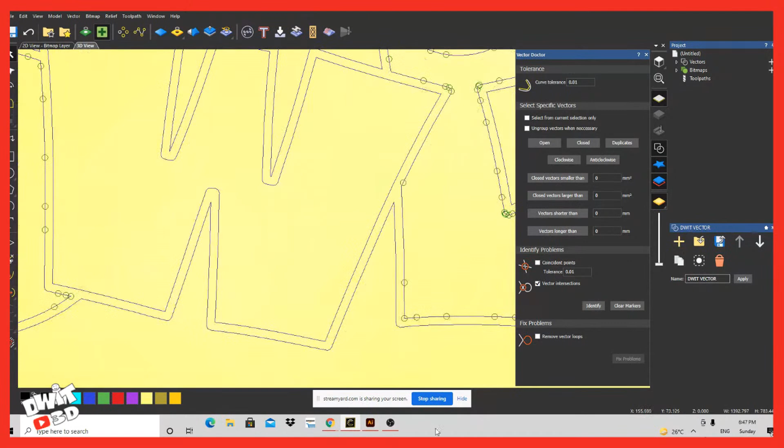Oh, I have to select the vector first and then check for it. Oh, and there's a lot of vector intersections happening here. But I think that's okay, because this is basically supposedly showing me where there's issues with broken lines. But there should not be any broken lines in here. So let's see, no, I think we're okay.

I hope we're okay. See, I told you I don't know what I'm doing. Hey Mike, how you doing? Good evening. So let's see what's happening here.

Let's see what happens if I try and add a toolpath to this. So what I want to do here is a V-carve. I'm going to select my size of my material.

And it was the thickness of this stuff. Let me double check, I got to grab my caliper here. Just got to measure the thickness of this stuff, guys. Hang on one second.

I know this is not your typical stream for me. I've never streamed actually doing software before, so I'm kind of new to this.

So it looks like we're doing 10.8 millimeter thickness here. I'm going to call that 10.5 millimeters thick on this board. Okay, there we go. So this piece of board that I'm going to carve onto is 10.5 millimeters thick.

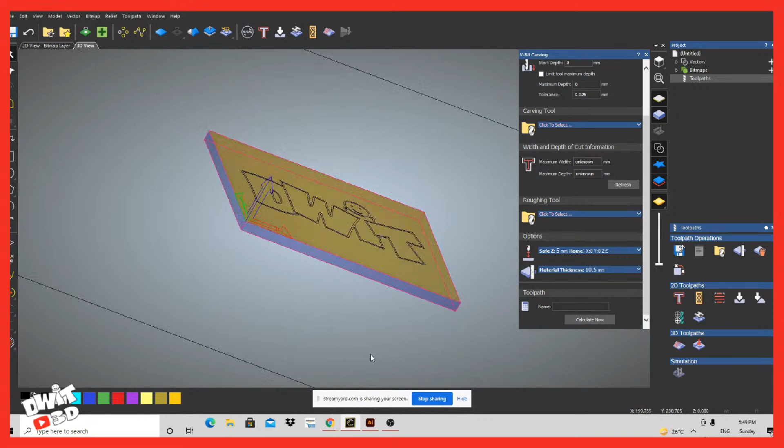So I'm not worried about all of that. The model position and material, we don't worry about that because that's only when we're doing 3D carving. So there's my material. Now in the 3D view, if you look, it's actually given a representation of the thickness of the material now that I've selected a material. Now I've got my material.

Now I want to check, I want to select my tool. Now I haven't set up any of my own tools in here, but they've pretty much got all the tools I need in here. So wood, and then a V-carving tool. Now my V-carving bits are 60 degree, I'm pretty sure they're 60 degree bits here. And they are 8 millimeter. 8 millimeter?

Because all I have to do is edit one of these and copy it. Oh, sorry, that's a 3mm bit. Now I think the 6mm might be the length. Yeah, I think that is, and this is a 6mm long bit. So we're good on that.

So I'm going to select this one, but I'm going to edit, and I'm just going to tell it that it's a 60°. I'm pretty sure this is a 60, or is this bigger than 60? Let me think. 60? Sorry, 60. Yeah, I believe these, no, these might even be 45.

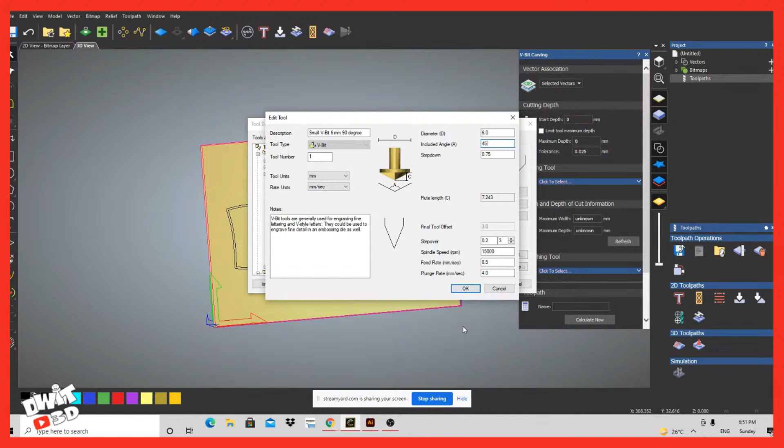So let's see. We're going to call, no. It's not a 60, 45. I'm trying to find in the packaging the bits that came with this thing. It's either a 60 or a 45, and it does not look like a 60 to me. It looks more like a 45° V-bit. So I'm going to go with that. I can always change that if I so choose afterwards.

So again, new to this software, so you got to bear with me for a second here. So my starting depth is 0 because I'm going to start at the top of the wood. Maximum depth that I want to go, I'm going to say a maximum depth of 3mm to start.

Whoops. No vector. Oh, I have to select the vector. See, I have to select the vector. So if I click refresh here, oh, vector intersections. I don't want that to happen. I don't like those intersections. Oh, this was supposed to go a lot easier than this.

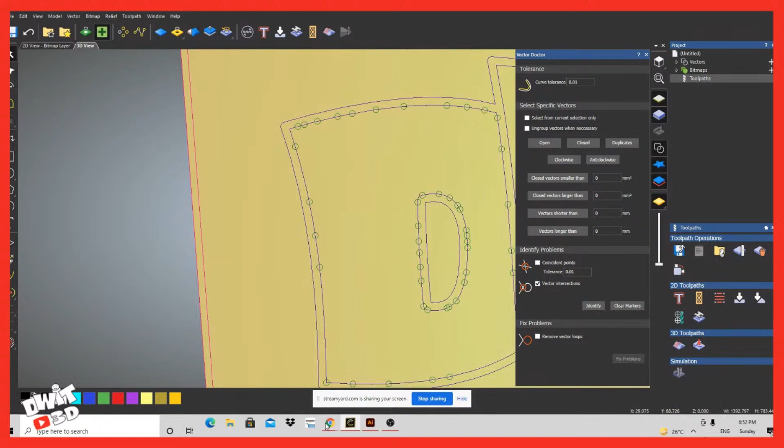So I could open up the vector doctor again. And I somehow got to fix all this. I don't believe... Oh, I see, that obviously I've got an issue with my file here. But there's no intersecting vectors there. What that's telling me is that there's two vectors overlapping, but there's not.

So I believe a quick way to fix that... Again, sorry guys, I just watched tutorials on this last week, so I'm pretty new to this, and there is a way to fix that. And it's to select my vector.

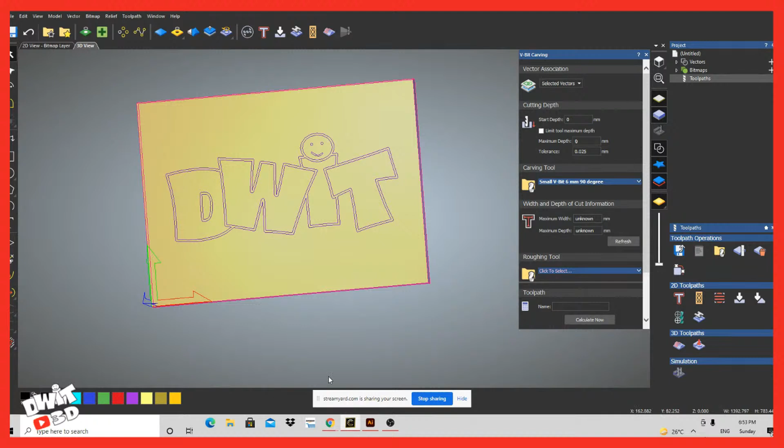Oh man, maybe I don't know what I'm doing here. Oh boy, I'm telling you. This should have been a perfect vector coming into here because I worked on this earlier this morning and made it a perfect clean vector. But obviously this software is finding some issues in this.

So let's go ahead and do that. Bitmap to vector. We're going to, there we go. So all I did was change it to a bitmap and then change the bitmap back to a vector. And that should have cleaned the vector up for me, but we will see. We'll find out in a second if it did.

Okay, so if I go back to the toolpaths, vector intersections, it's still finding vector intersections even though I cleaned it up. Okay, so I wonder, okay, I think I see what I did here.

I believe... oh, you know why? There it is. Okay, because sometimes when it brings the vectors in, there we go. And that's what I remember, it brings in more than one layer for some reason.

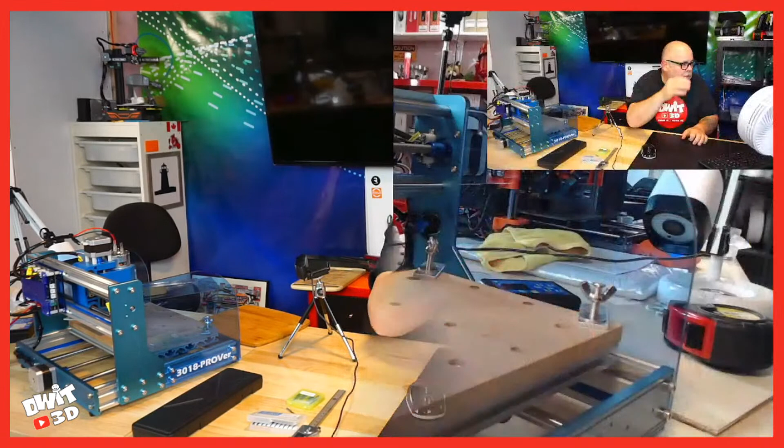So let's go to my bench camera here, to the machine. I got my V-bit. So we're going to insert the V-bit. Get my handy-dandy wrenches.

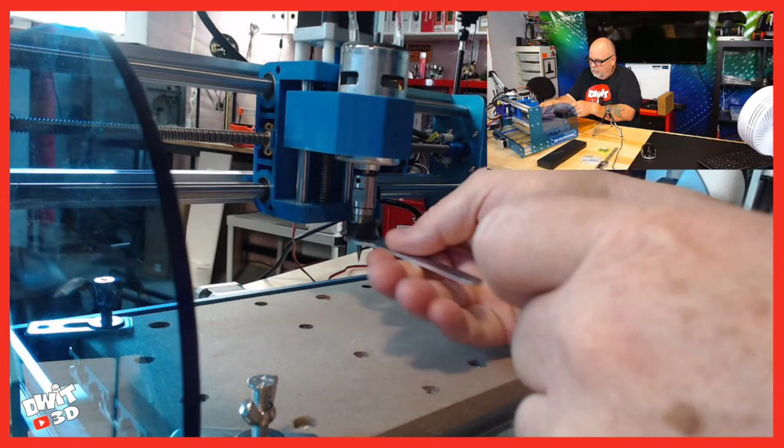And we're going to tighten that V-bit on. Keep getting my chubby hands in the way of the camera. Okay, V-bit's tight. We're going to plug the SD card in here.

Thanks, Thomas. You enjoy watching others suffer?

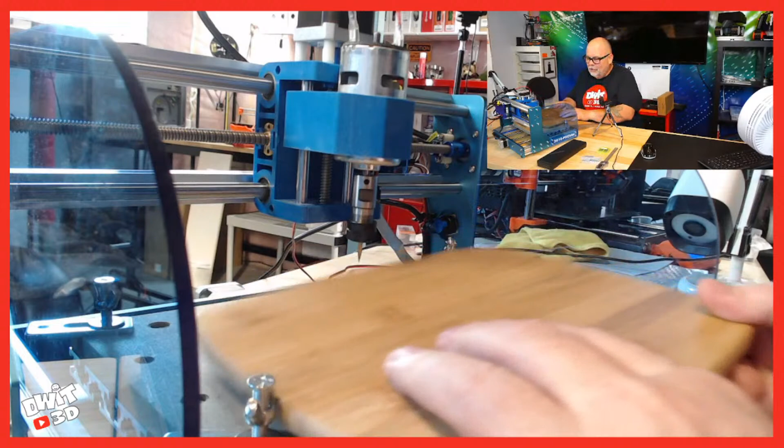I can understand that. Now, you may all criticize how I put these on, but these have worked fine for me so far. So I'm just going to tighten these down. I know I need to get some pieces of wood under these things, but this has worked okay for me for now.

Got the wasteboard on here. No problem. I haven't leveled the wasteboard yet, but the couple cuttings I did do, it seems to be pretty good as it is. So let's just secure this down.

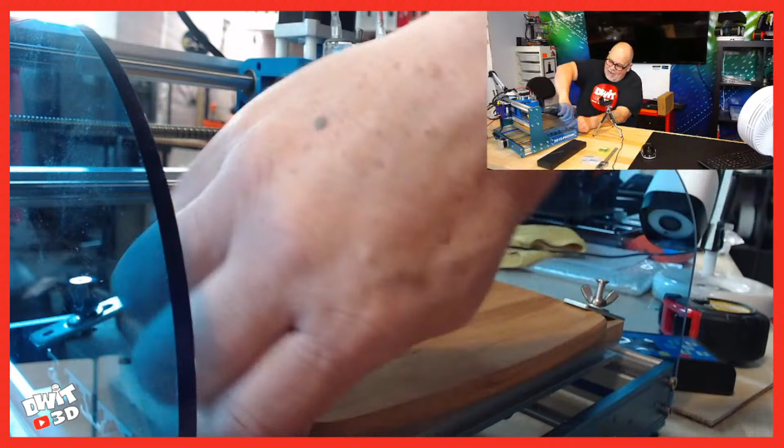I tried the tape method with the super glue, works really well, no complaints at all with it. Yeah, I need to get some blocks under these other ones so that they level, because this is tightening on the angle that it's on, but that's extremely snug in there anyways. So that's going to hold that in no problem. Okay.

I want to 3D print some arms that have various heights so I can just put them in here. I've just been doing this for now, but I agree with you, Thomas, and you're right. If it hits a 3D print, big deal, it's not going to break the bit. Versus hitting these, which will kill the bit, right?

For sure, so let's power this up. I'm going to come down and just home it over here, but the XY home isn't going to basically work, what I found is whatever I home on here, X and Y, it's overridden by the G code on this card. So ideally, because I put the size of the board in the software, it's going to hopefully put this right in the center. I think I had it centered in the software. We'll see, but this is where I do have to do the Z for sure.

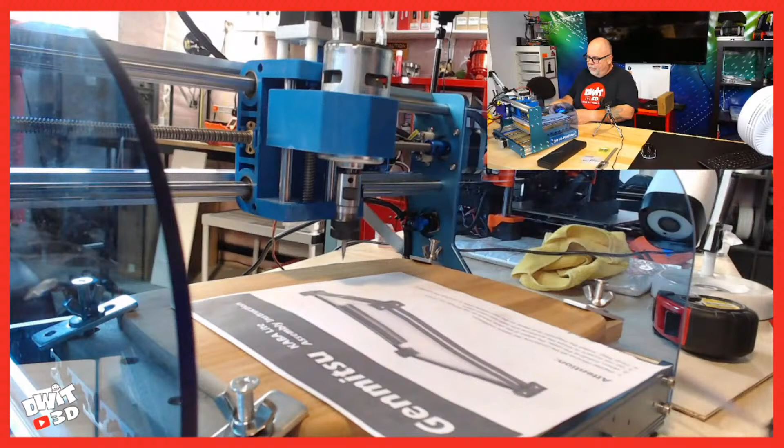The way you guys showed me last week for doing the Z is the way I'll do it right now. So we're going to move X over here. I think I'm going to go 100 because it's quite right in the middle there. Don't think I'll hit the limit switch there. No, not quite.

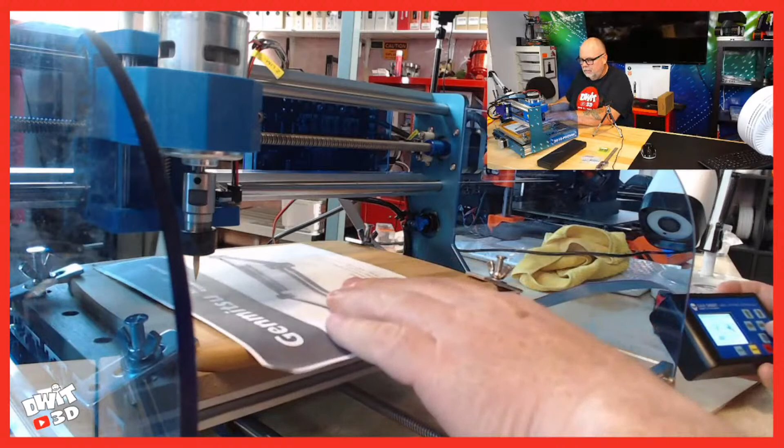Okay, now we're going to bring Y forward. Oh, other way, I keep getting Y backwards. Why? Because I like it. Okay, and we'll bring Y forward a little more.

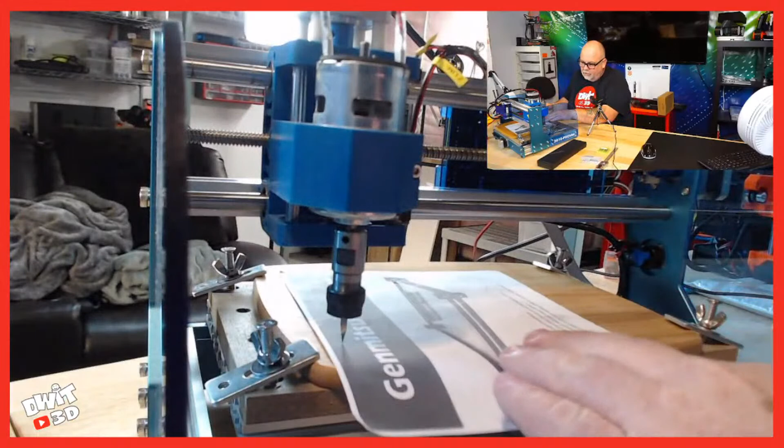Okay, now we'll bring the Z down and we're going to home the Z. We'll do it in 0.1 increments. Let's get the camera around here. So we're going to just bring the Z down. I like this way of homing Z, the probe works too, but this way I get the feel for it. There we go, that is right under, so we're good.

Then we go to select, then we go to control, and we are going to zero X, Y, and Z. Okay, now I'm going to enter, and I'm going to find my file. DWIT bamboo.

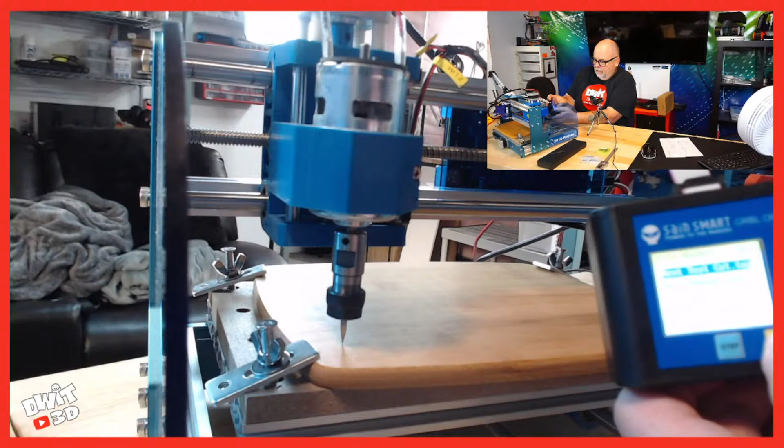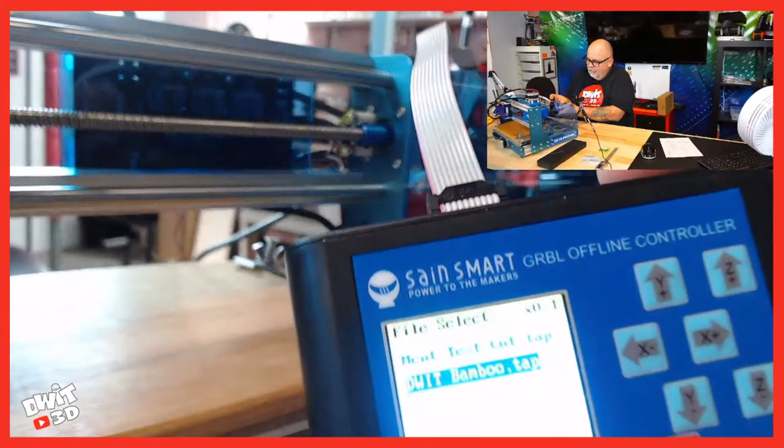Oh, you can't really see that too well. DWIT bamboo, and it's called TAP. Some of the other files on here, the extensions are NC, but this one's extension is TAP.

Okay, and then now safety first. Where are they? If Jerry's watching, if you're watching, goggles. And then depending on the mess, who mentioned the vacuum comment?

Aha, and we're going to hit enter and go. So we're going to move into position, here we go. Let's see what happens. Oh, just a couple dots. So let me get this other camera on here as well, see if this is any better. There we go.

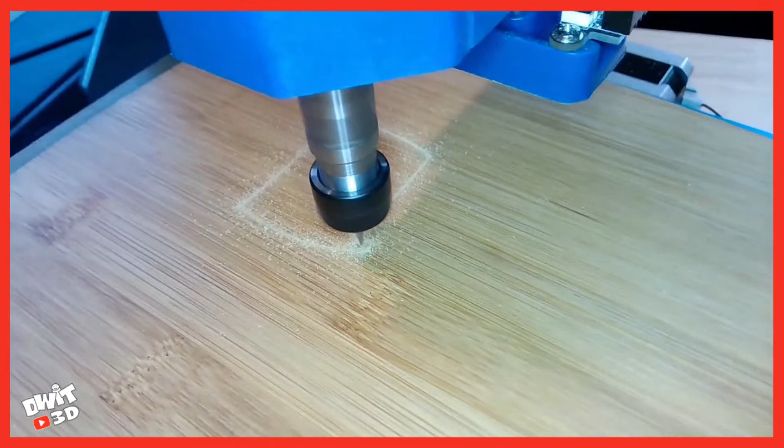So let's do a few passes according to the software, and let's just see. I'm off center, I obviously didn't center it properly in the software, but that's okay.

Suction, suction. It's art, it doesn't need to be centered. Yes, exactly. Expensive way to make sawdust? Absolutely.

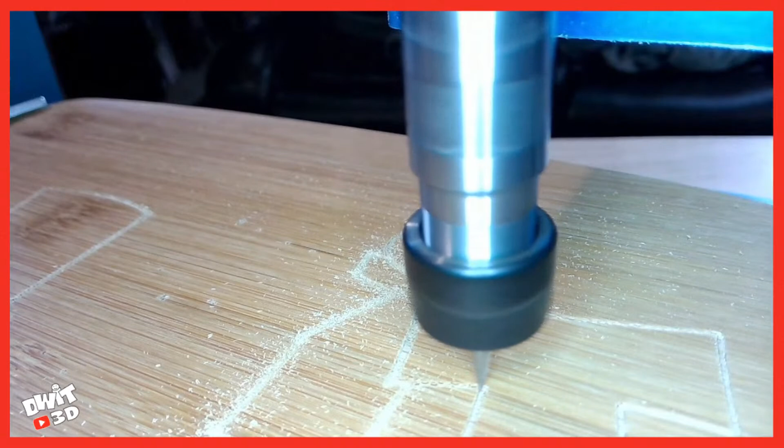Interesting little down movements there. I don't know why it's doing those, but almost like it's creating a boundary that it's going to then go around and clear out. It's probably because it's the corners.

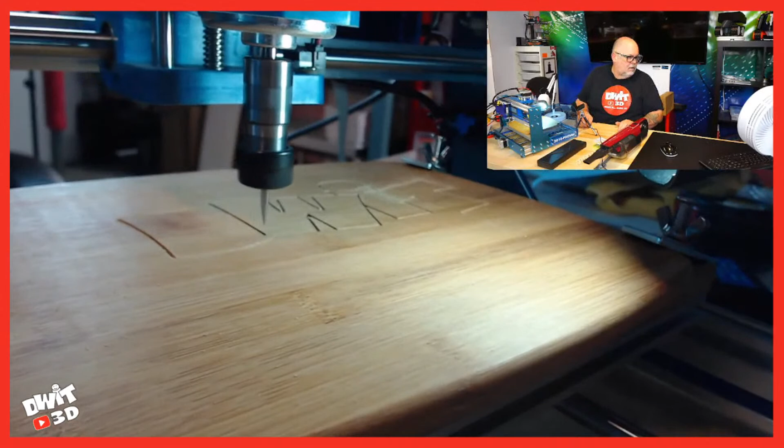Go even faster? Yeah, okay. Now that would depend too on the material you're milling, I would think. Bamboo seems to be pretty soft.

Well, 21 people watching my paint dry, which I like. I appreciate you guys sticking around. Just like me, you want to see the finished product. Suction.

I think it's going to look decent. I really do. You get a little higher angle on that, you can kind of get an idea.

It's going to be different than - obviously lasering is a much different look, but I kind of think Mike had the idea, if you pour some nice deep red resin into that.

But, yeah, it is looking very clean, John.

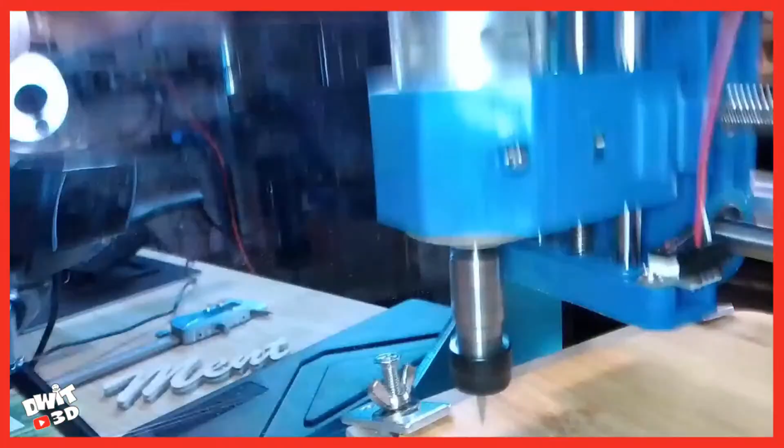We are done. Just me, or was that painful?

Anyways, first thing I'm going to do, let's move this bit up out of the way. Let's, you guys see what I'm doing here. Whoops, it's like my camera's drunk. Okay, I'm just going to move it. Oh, I went too far, I hit the limit switch.

Now I can actually set this so that it basically presents itself like this to me when it's done. But I didn't do that, obviously.

Just going to vacuum this out, then we'll have a look at it. Okay, let's unclamp it.

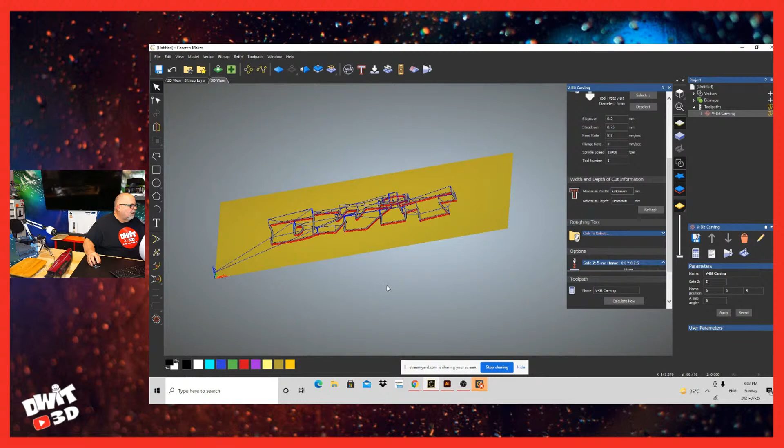Now, this is what we just did - red Sharpie, a very fine point Sharpie. Use blue tape before you engrave, it will prevent the chips. Good point - green painter's tape or blue painter's tape, same idea.

So if I clear this, get rid of this V-bit carving. Let me make this full screen for you guys. Oh, I got to do this. So if I get rid of that, now if I close that, I want to add a new tool path, and let's suppose I want to do a cutout of it.

We'll select the thickness of the material, which was 10.5 millimeters. That's not going to change. And let's click the tool - this would be a roughing and 2D finishing tool, an end mill, 1.5 millimeter end mill tool. And on this tool, 10,000 RPM.

So we have a feed rate of 42, which is much higher than we were just using. But the material - I'm going to try something here, and if anybody wants to stick around while I try this, why not? Material thickness, I'm going to set up, and the material I'm going to cut is 5.5 millimeters. I happen to know because I did a cut today.

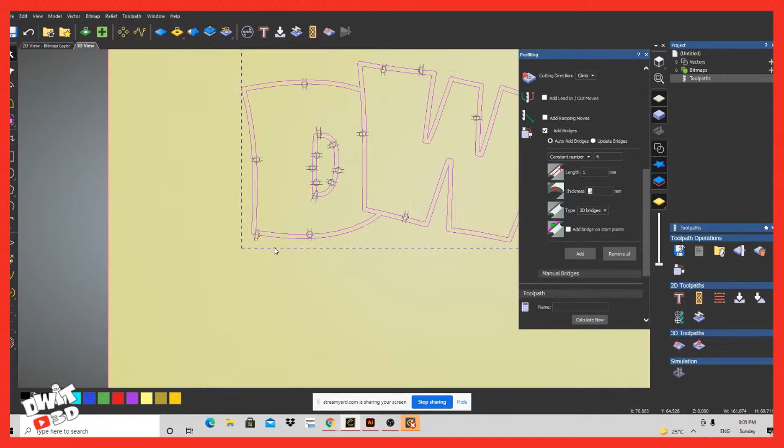I'll go for it - add bridges, constant number of 4, so it's adding bridges where it thinks I need them. That's a lot of bridges. But for what it's doing... oh, I think that's going to cut out differently than I think. Especially, I'm just curious what this does.

So if I calculate the tool path, that's a lot of passes. Each red line indicates a pass of the tool. So I can go a little more - it's stepping down 1.5 millimeters. That's only going to step down 1.5 into 5, which is 3. That should only be 3 passes. I wonder why it's doing so many. I think this isn't going to cut the way I think it's going to cut.

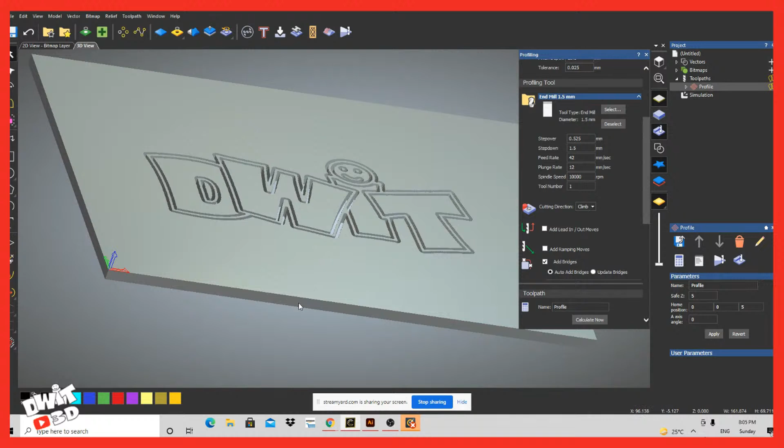Oh yeah, that's going to cut more lines than I want it to cut. So yeah, okay, that's sort of not what I was after. Because that's going to cut that right out like that. Okay, so what I was trying to do more...

This isn't really a perfect job for, let's just go back to this and get rid of that cut view - I believe it's this one. Oh, I got to clear the simulation, that's what I got to do. Delete the simulation, and I'm just going to delete the profile for now.

So what I need to do - oh, how do I clear all those? Bridges, clear bridges, remove all. Oops, remove all. There we go.

So what I wanted to do, I guess I need to delete inside vectors. That's a really tough one to cut out because the middle of the D will fall out without a big bridge. So really what I'm after is something like that with that drilled in it.

But just because I want to try something here and show you guys, let's just do that. This will definitely - 1.5 millimeters is a deep pass. Yeah, I'll only keep the outside, Liam - that's what I was working on now, obviously I didn't see your comment, but it really only works better on outside paths. I could do inside, but then I'd have to do individual bridges, and I don't want to take that time right now.

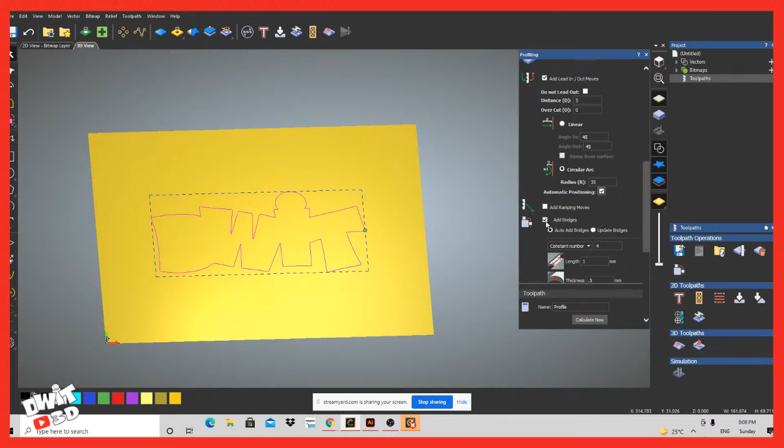Okay, don't want to ramp it. And bridges, we're going to add, see what happens there. Okay, that looks not bad. That's better.

That's a better looking cutout. Okay, and my material stayed at 5.5 millimeters.

Let's simulate this one. So this is going to go in, it's going to cut, it's going to cut. There's my lead in and lead out curve. It's going to cut it a fair amount of times, but it should keep it nice and clean. And that should go right through the material.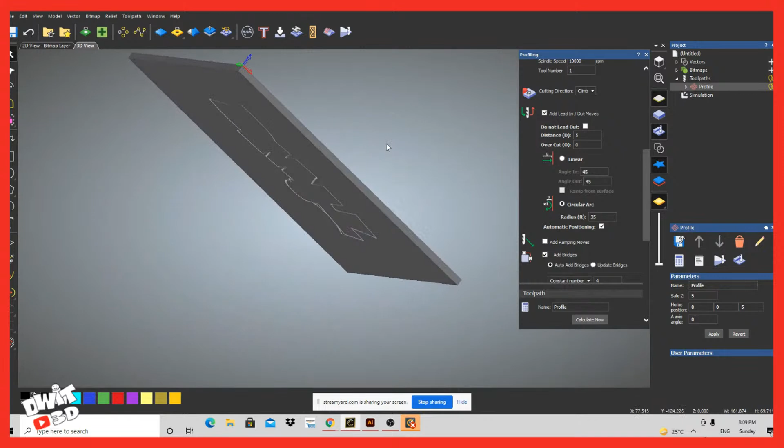Okay, but the bridges didn't go in. So what I need to do is go in and add the bridges. There we go. So we have 1, 2, 3, 4 bridges. That's fine, that's just to hold the piece in place.

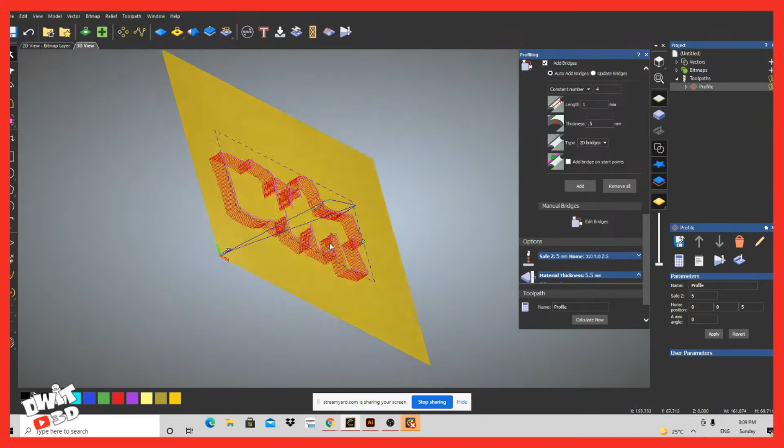Calculate now. Oh, my material's not showing in there. There we go, there we go. And that should work. If we simulate that profile, the tool path, there we go, and it should show somewhere in there.

Oh, it's not showing the bridges. But the bridges are there, I hope. Yeah, we'll have 4 bridges showing. Well, let's try it. Spoil board for cutout.

I have a spoil board on here. So what I'll do, for those of you that want me to do this, first thing I'll do is go and take this profile. I'll save it as, we'll call it DWIT cutout. Save it on my E drive again. And we've got the SainSmart 3018 Pro.

Okay, done and save. If I hit save, that's one thing. If you hit save, it's saved. It doesn't look like it did, but if I hit it again, it wants to know if I want to overwrite it. So we know it's saved.

We'll eject the card. We'll bring back my pretty face. I'm going to put the card in the reader, and we'll switch over to the bench. There we go, and let's get this bit out.

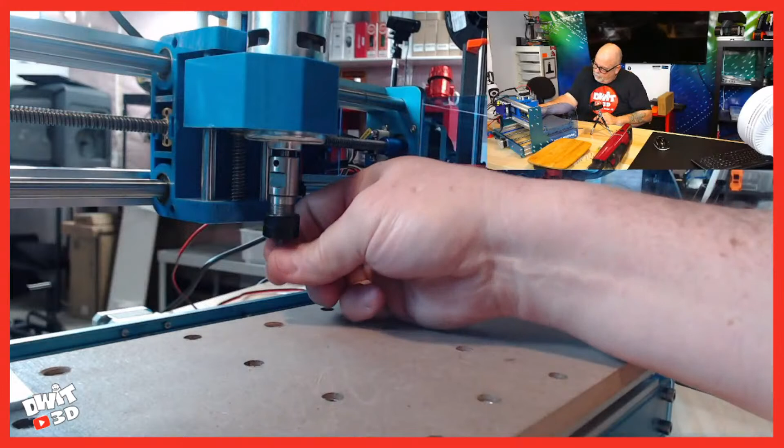Back this up a little bit. Pull the V-bit out, put it in its case.

Yeah, we've got a good spoil board. Nice solid spoil board here. And let's pull the 1.5 millimeter bit, put it in.

And the material is right here, just a piece of 5 millimeter plywood. Pretty much the only plywood I've got right now.

Nice and solid, one more clamp here. Clamp down nicely. Okay, power this sucker up.

Don't forget to set the cutout path. Did you set it? Yes, I did. It's outside the lines, there's outside the line and inside the line. I set it for outside the lines. I'm just looking for, before I get started too far, there we are. Safety goggles, important.

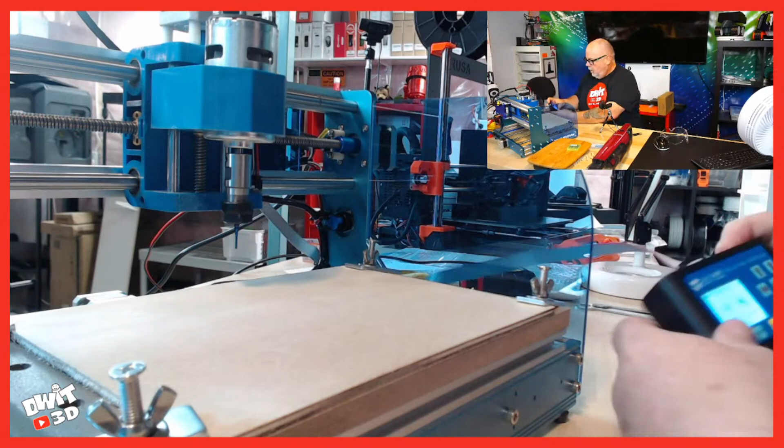So I'm going to bring Y back. It's going to bring this back somewhere where I can hold it. Let's bring X over.

Okay, and let's get Z homed. That is good right there. So we have Z homed, X homed, and Y homed. We'll go to Control, we'll go down to 0, X, Y, Z.

Okay, let's raise Z up a little bit before we start. Okay, let's go to the File menu, and we'll find DWIT cutout. Get our safety glasses on.

Safety first. I'm at 0, not home. Home first. Oh, I see what you're saying, you're at 0. I get what you're saying. So home first. I think this thing might be in the way of homing on this one side. I see what you're saying, you guys. But I don't want that to hit.

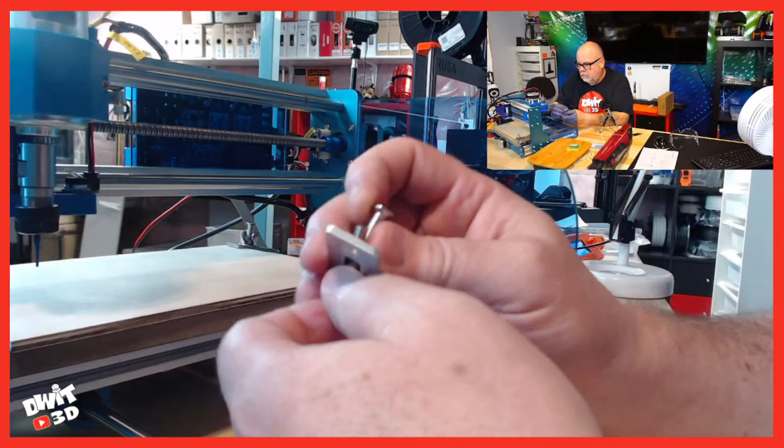Okay, we're home. Now I can go ahead and zero my XYZ. Okay. I get where you're coming from, I see what you're throwing down.

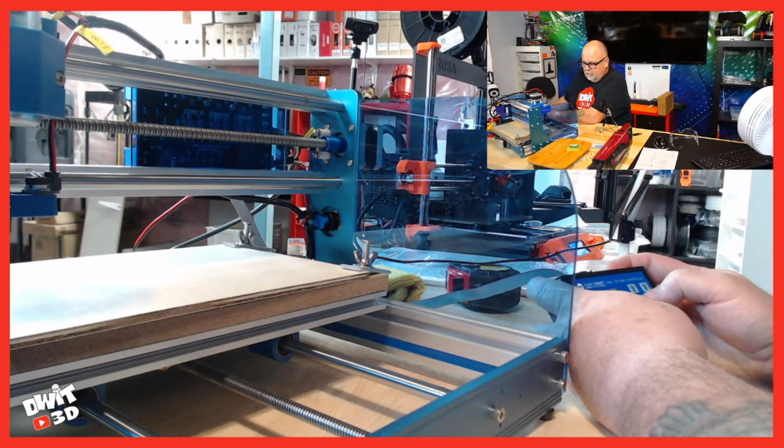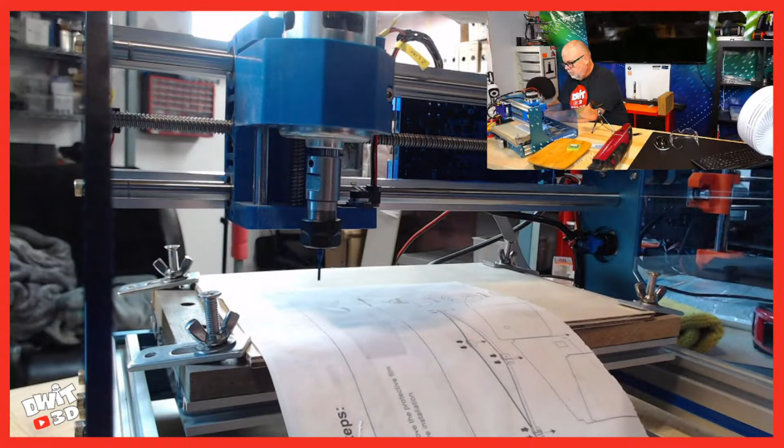Okay, let me put this clamp back on real quick. And I got a zero Z again now. Zero Z. Okay, got you, Liam.

There we go, perfect. Now we'll home it. Zero it. There we go. Okay, ready to cut.

Oh okay, not homing is why the engraved logo is off center. Makes sense. Okay, so this one should come up cut out of the center of the wood then. Okay, let's see what it does. And let's get this other camera going too.

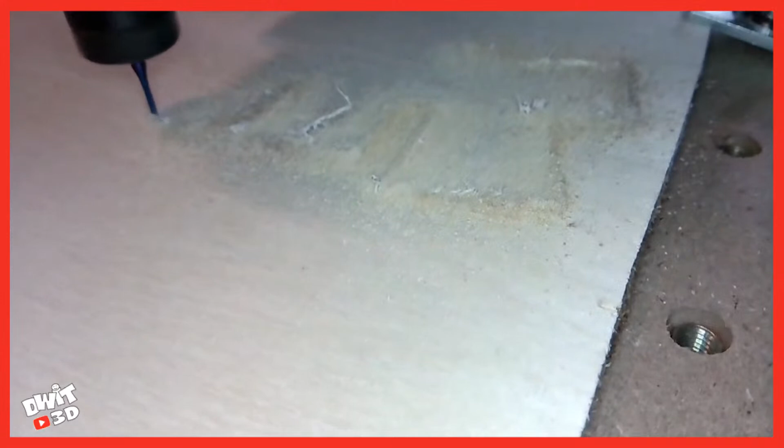Okay, makes sense. It's a learning curve.

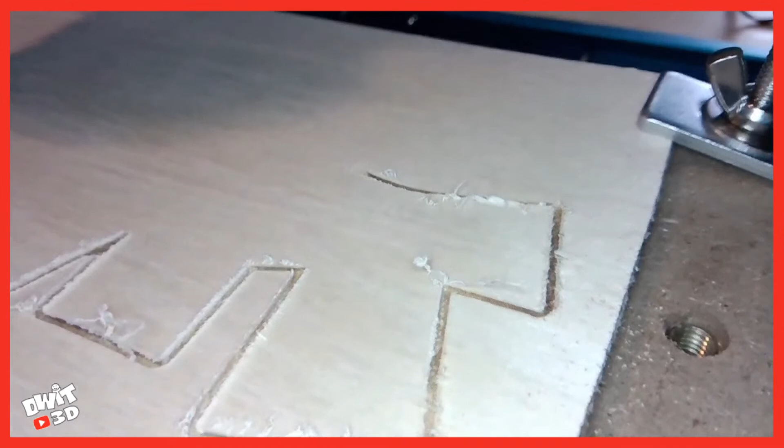Yeah, because it's off center to the right. Up and down is better. Okay, I gotta learn these things.

Oops. Damn, camera. Sorry guys, my camera mount just broke.

This one needs more suction.

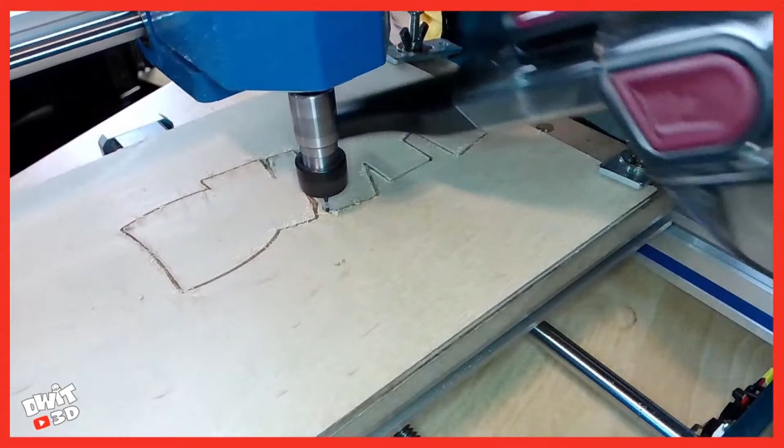That's a cool little suctioning vacuum. Yes, I did. Oh, 5.5mm, Liam. When I did 5mm on my first test cut earlier today, it was onion skin, too thin. It needed 0.5mm extra to cut through.

I guess I could have cut the center of the D out now that I think of it. I should have left the center of the D in there to cut out. Oh well.

Am I cutting into my spoil board already? I don't think so. Let's see. Not quite. We'll see.

0.1mm. 4.1mm. So it's a 5mm board. I'll check the depth again after it gets through the A here. I don't want to get too close to that blade, obviously.

0.03. This should be the last cut. It might go once more to get to 5.5. Yeah, it's going to go one more to get to that last point. 0.2. This will be the last cut.

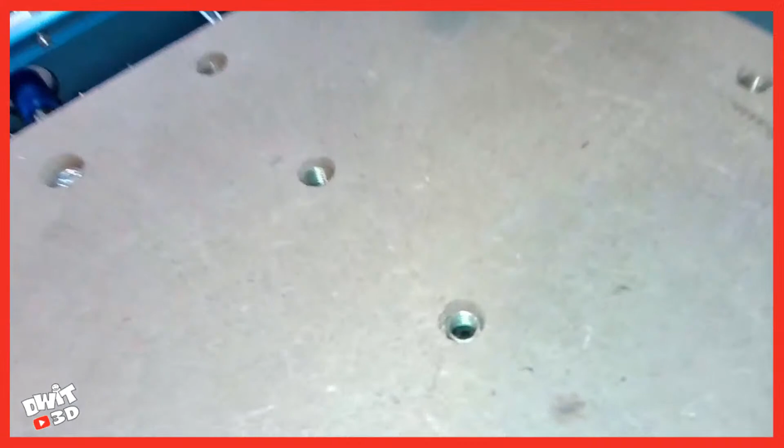And here we go. So, hardly scorched the spoil board at all. And hardly, you can see a little bit there. Not bad.

Okay, so that came out a little cleaner than... Oh, let me switch, sorry guys, I got to pull this over to this screen here. That came out cleaner than my initial one, my first one, because there's not as much detail in it.

So here, let me get it on the close-up for you guys. So not as much cleanup to do on that.

I should have cut the middle of the D out. I didn't even think that that wouldn't have been a problem, and I could have actually milled out the mouth and the eyes. But that, I'll learn as I go.

But yeah, the tabs, it didn't even attempt to do the tabs, which is interesting because they were still in the drawing there. So I got to work on those.

So the camera angle did make it look deeper, yeah, but I was watching it because generally when it cuts through, you can see a little bit of warble. But yeah, that spoil board was hardly touched.

This side's nice and clean, and a little bit of sanding and that'll look pretty good. Actually, I can just draw the middle of those on and keep that. And then there's the board that it was cut out of. So not bad at all.

Not bad at all, so that's pretty cool. So I like that, and I made the software look a lot more difficult than it is.